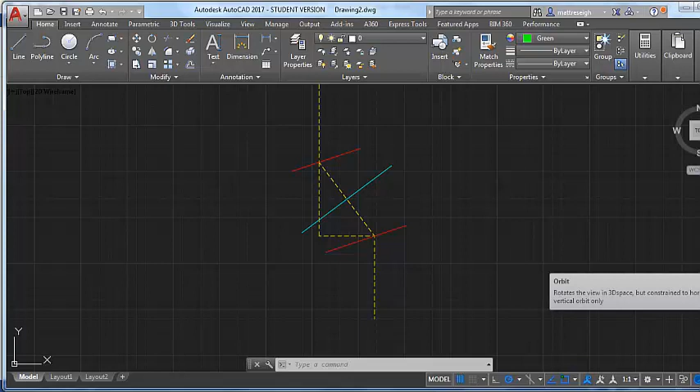So we're ready to pick up here, and we've just done a lot of reference material. Now we're ready to really start putting in our pipe, the drawings that represent our pipe here. So one quick reference check: we're working with 4-inch Schedule 40 pipe, and this 4-inch Schedule 40 pipe has a 4.5-inch OD, so that becomes the figure I'm going to start using now.

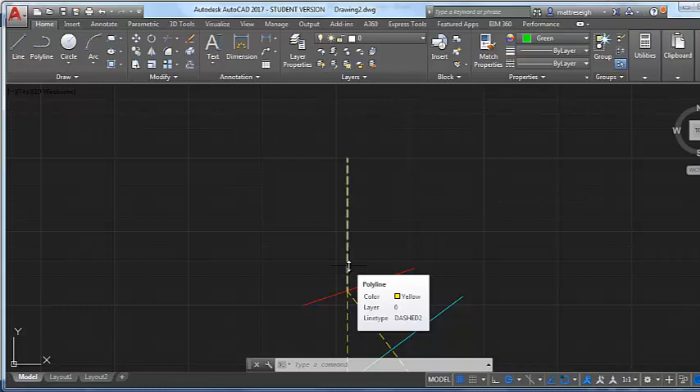Back to my drawing here, this is the way I like to set this up. We've got these arbitrary length lines off my triangle - they're just the diameter of the pipe up. It gives me a workable length of pipe. I could modify that as needed, but for right now, this length is just the diameter of the pipe, which allows me a place to set a point to do my development circle.

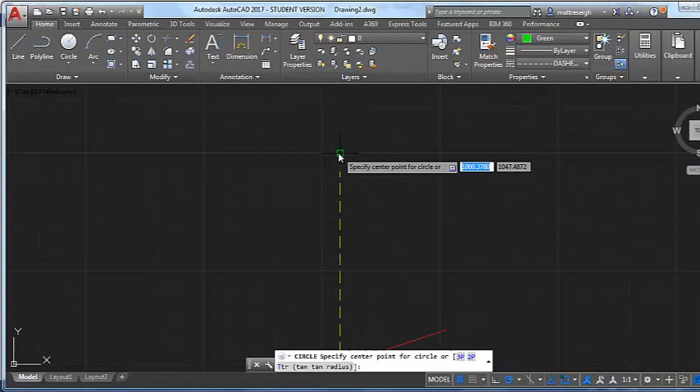All right, so the way I do that, I'm going to do my reference circle here. This is going to be a diameter of 4.5 inches, and I've used that as my center line. I'm going to copy that circle, trim that up, and divide it like we would to get some projection lines here.

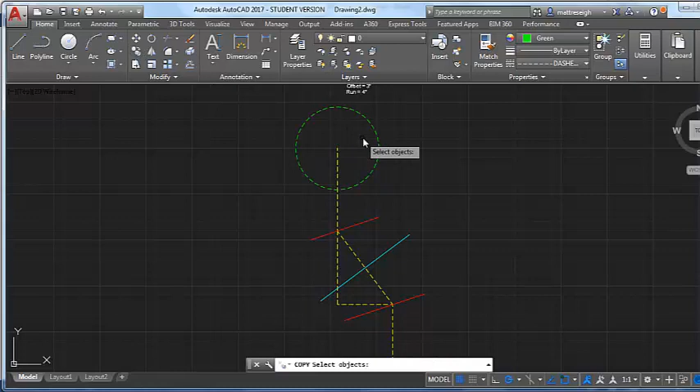So let's copy that and put one down on the lower. Let me actually do that now. From the center point here, I'll get one down here while I'm at it - same diameter of pipe all the way through this joint.

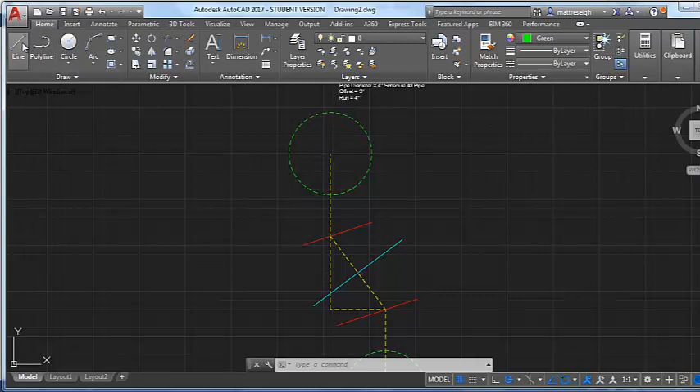And then I'm actually going to put in a solid line here for my quadrants. That's the start, or kind of end, of my pipe run there. This is where I'm going to trim this out - this is going to be my development circle up top here, and I'm going to trim this out away from it. That's going to be kind of in my drawing space here.

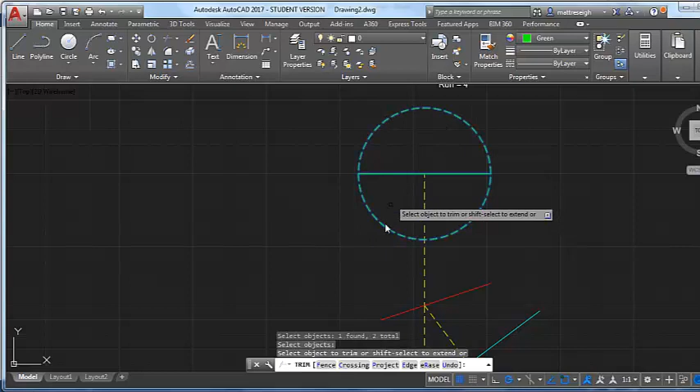Yeah, I can just trim that right now. I'll put in this upper one, and then I'll go to the lower one here. So this is what I've got set up as my development circle here, ready to divide and ready to project some lines through my part.

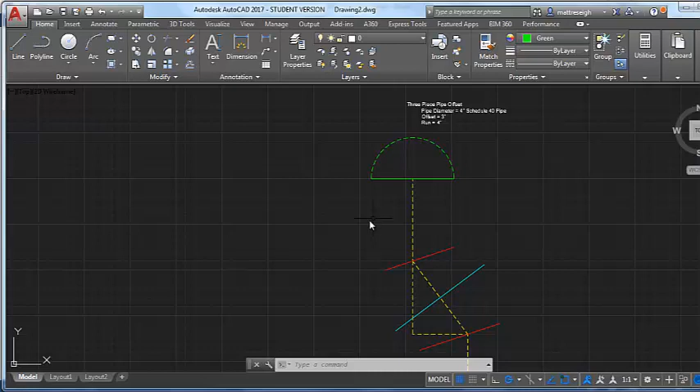Where my solid line is actually the start of my drawing, I want solid lines that come down from it - parallel lines here that meet my miter. There's a lot of tricks I can use to draw this in, and if you have tricks, use them. If something's quick to you and makes sense, use it.

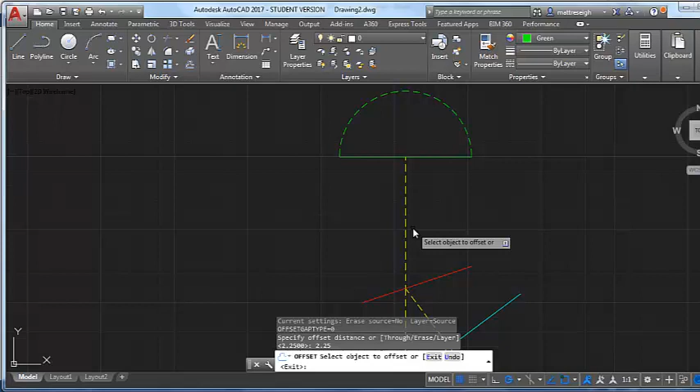Maybe something that's really simple is if I have this as an independent line here, I can use this offset, because this is my pipe center here, and it's asking me my offset distance. This is 4.5-inch OD pipe, so I'm going to offset this line on both sides of the center line, which ends up being 2.25. Then I can pick this line and snap that line over, and snap that over.

So that's starting to put in the sides of my pipe that are coming down to this miter line. They're not quite long enough - I'm going to need to lengthen them, get them to match up. My miter line isn't long enough. On one side it's almost pretty close to perfect, which just happened to be that way. It wasn't like I shot for that or anything, just almost close.

And these all change to a solid line too - they'll just be solid green because they are the sides of my pipe. So I'll change that. I'm going to escape that command so I don't offset it anymore. Yeah, I'm going to change these to a solid green.

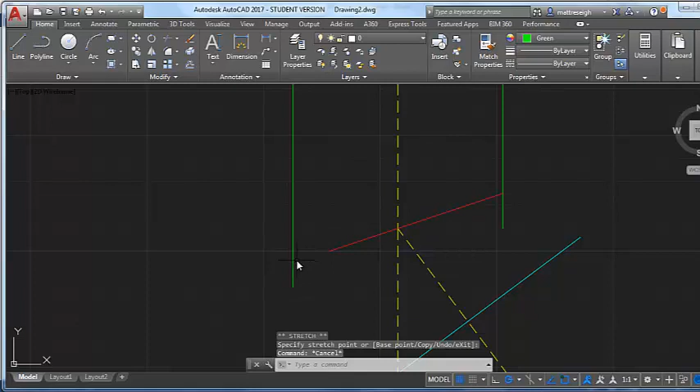Now here's where I could run into some trouble, is when I go to extend this line - this one I need to extend and come up. It's going to trim it into where it fits where this one comes in. This is where a lot of people have trouble on their drawing, because I think I drew this miter line as a polyline. So if I go to stretch this to where it intersects, this seems like that was easy and it worked good, but it always pulls off - these polylines always pull off to me.

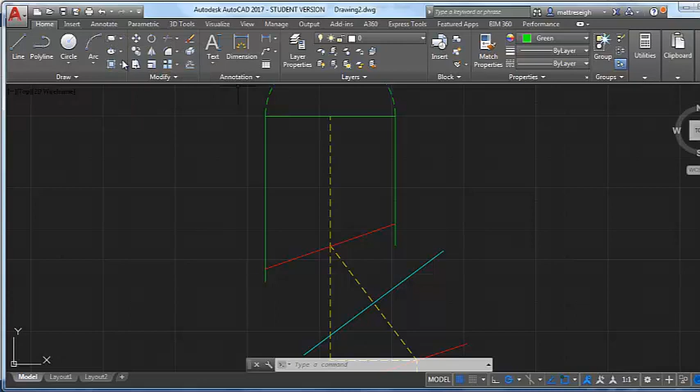So what I want to do to actually fix this is I just want to delete that line. I wish I would have drawn that as just a line. This is the difference between drawing a line that I can lengthen and stay right where it was, versus a polyline that's easy to pull off - I've just noticed. So I'm just going to delete that, and delete this one.

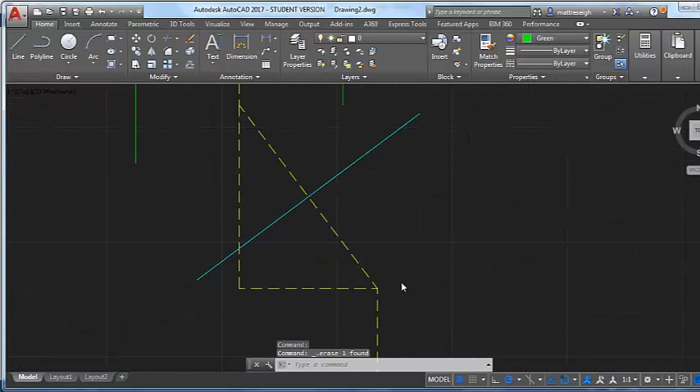This is why I like to keep my reference circles up, not just delete them, because I can come back to just this upper one where I established that miter line right there. So what I can do is go back and draw this as a line rather than a polyline, and I'll show you the difference here.

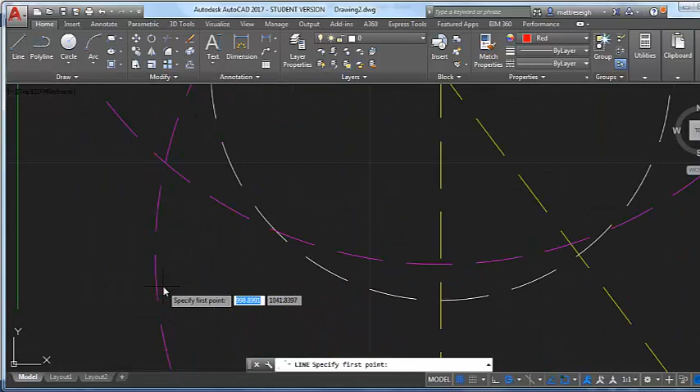So now I'm going to snap from here. I think I had adjusted that line before I did my video, and I should have ended right there, so that was throwing me off a little bit. But now I've got that as a line.

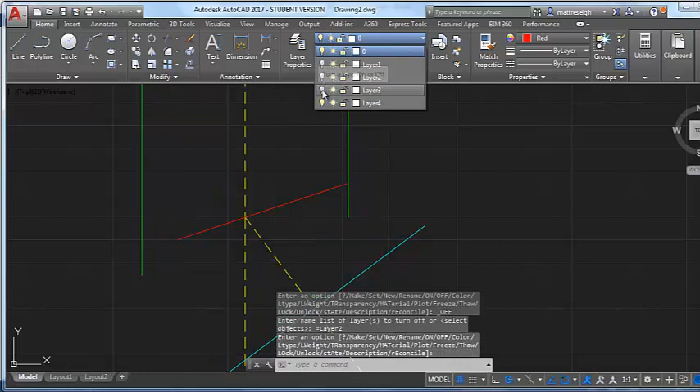I'm going to go ahead and turn off that layer now. I'm going to do the same thing on the bottom - turn back on these development circles and draw this miter in as a line from this circle to this one. Okay, and go ahead and turn off my reference circle.

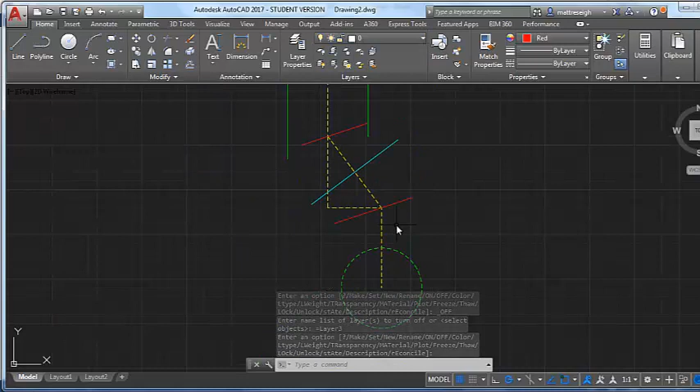Okay, those are essentially the same lines that I had, only they're lines instead of polylines. I'm just making sure they pass through my point of my angle. They do, and so what I'll show you is I need to get it out to that line.

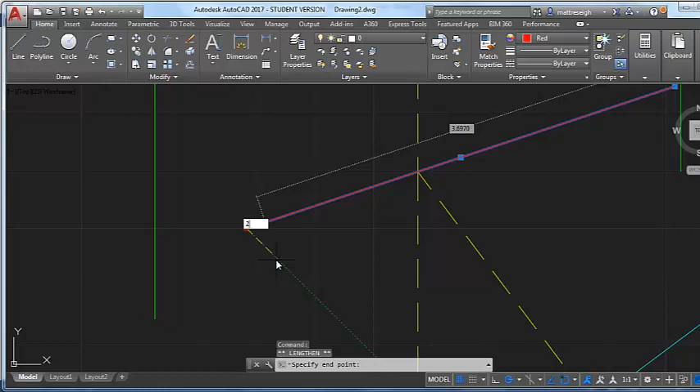If I just hover over this, I can lengthen this line. Lengthen - click on that. Maybe I'll just lengthen it by like 2 inches or something. Well, I went the wrong way because I pulled it. Let me undo that. Let's try that again.

Escape it here. I want to grip - I just kind of go to this lengthen command that pops up there, and I'm going to go 2 inches. I just have to put it in the direction I want it to lengthen. And you can see there that it didn't pull it off - when I did that, it kept it on its point.

This is just something I've found from trial and error, that I could easily mess up when I'm manually drawing. Maybe this one doesn't have to be as long, just like an inch. When I'm manually drawing it's easy to mess that up. So now I've got these overcrossing themselves, and it seems like a lot of tedious work here, but I'm just trying to get an accurate drawing that these come together.

Because I can just grip these now and tuck these into where they meet each other. Sometimes, in some respects, hand drawing like this in AutoCAD is a little bit more laborious than just doing a drawing on a board - that's a little bit easier. But so now I've got these where they intersect each other, that's great - they're tucked into each other.

I'm still on my point of my miter point at the end of my development triangle, and that's it. So that's actually, I've just kind of drawn in the top section of that pipe.

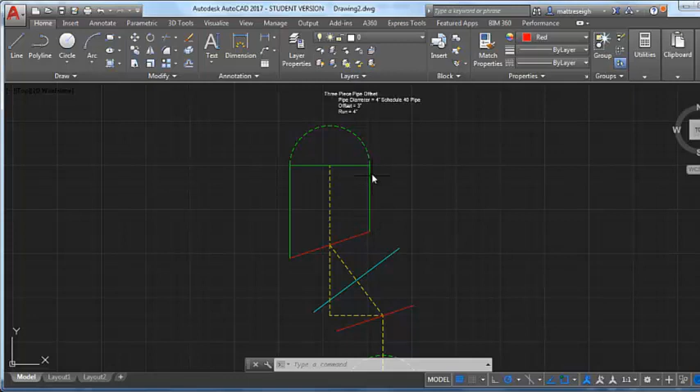And I'm going to do that down here now. I'm going to get these up to my miter lines. Then from where those meet, I just bring those together, and yeah, even if I offset this 2 1/4 inches that way and that way.

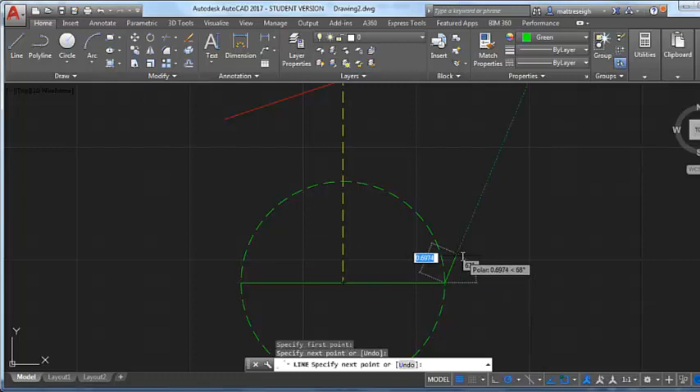But let's start with the bottom development circle - let's get it to the same point. I went back and changed that to a line when I did that with the other one. So let me continue that. Sometimes I just try to remind myself I can just draw in lines and be a little safer - I know we're used to drawing in polylines a lot. So that's that, I can trim that out.

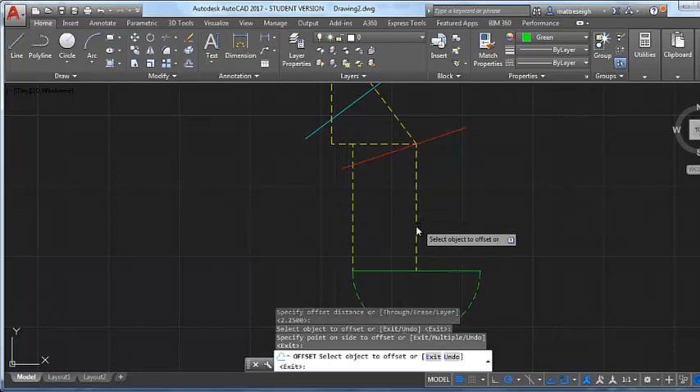Alright, and I just like these offset commands. It's got an auto that's 2 1/4. That's great. I want that one, and I want that one. I want those to be solid green.

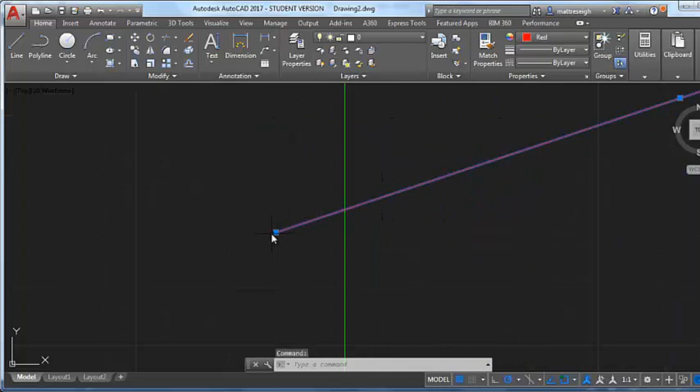So this one I did a little bit bigger reference circles when I drew this miter line, because these ones do intersect, and if I'm doing this often enough, I kind of get good at guessing and saving myself a little bit of

extra work if I can guess those, so that I can do that rather than have to extend these. But I find that these ones extend easier. It's just when they're at a miter angle on the drawing grid, that's the one that gets pulled off. Like it wants to auto snap to a degree.

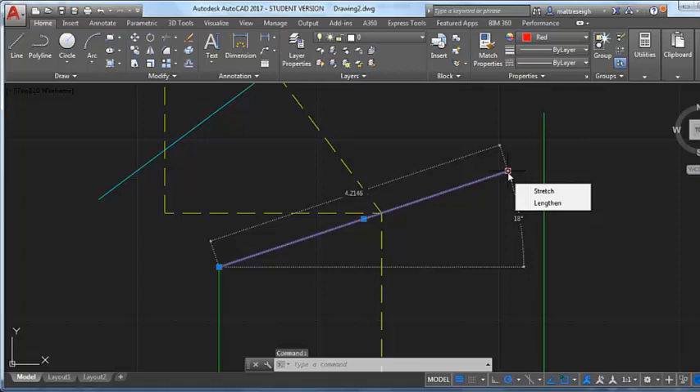Anyway, just double check yourself always when you do that. Make sure you don't lose that point. I've just had a lot of that go wrong, so I've kind of found that's what's happening.

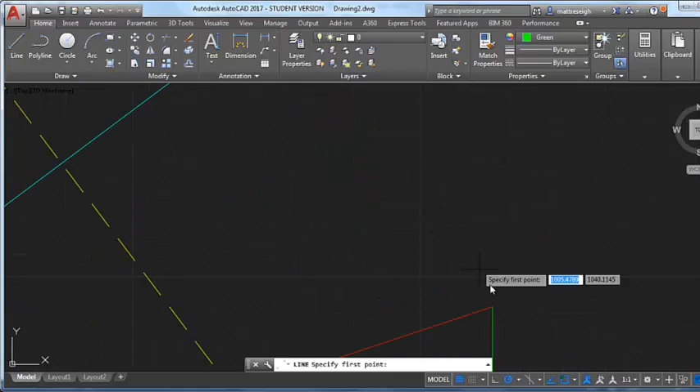All right. So now we are ready just to hook these together now. Like from where that point hits that point now, and back down here, if I repeat that, that should be my part. And then I can actually tuck this in

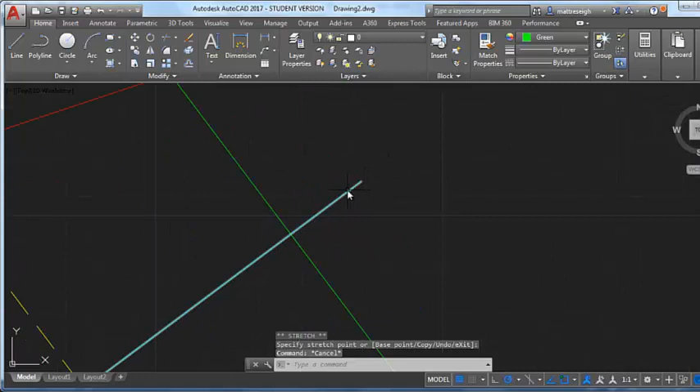back to the middle, because I had drawn that excessively long. That's just the middle. That's actually the middle section of that. That is actually the midpoint of that middle gore.

And it doesn't maybe, with that triangle in the middle there and those center lines, that kind of looks crazy to me. But really, if I look at this pretty hard, this distance from this center line up to this point is the same over here. And then the short side here is the same over here. So it is actually a center line of that middle gore.

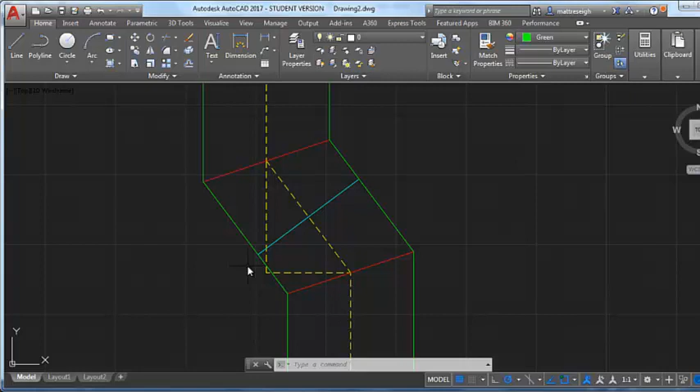And that's critical. We're going to use this as kind of the point where we develop that from. Kind of top and bottom of that. So, all right, here's our pipe offset. And we're ready to do some

to divide these circles and bring some lines down. One thing I like to do once I've done that, it'll also show me if I've pulled my miters wrong, is I can do like a quick dimension here

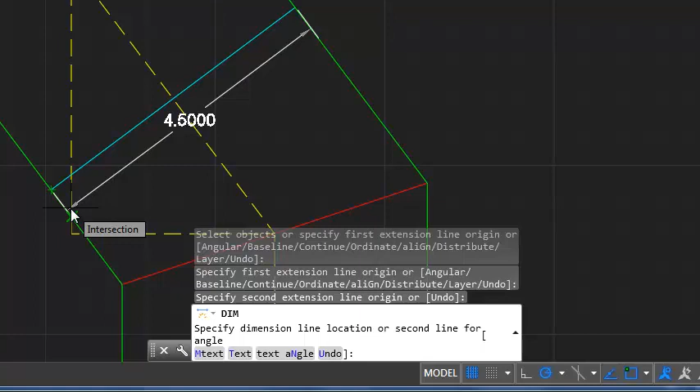and make sure that this is the outside diameter of the pipe. If this isn't, then I know that the points of my miter aren't in the correct place and they've pulled the diameter of my pipe off. But right here, I've just done this little double check that my 4.5 is still maintaining through that middle gore. So I like to double check that.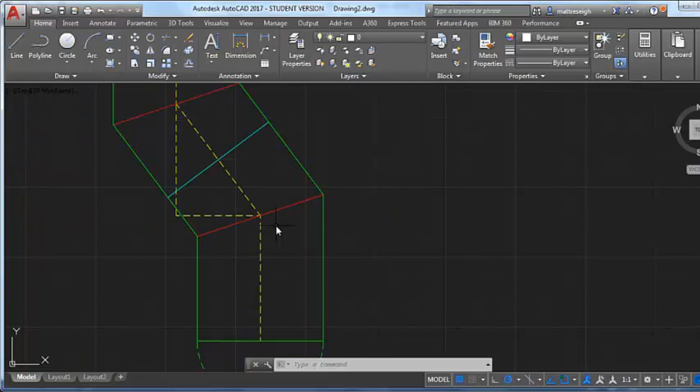All right, and once I see that's okay, if not, I know that what has happened is I've pulled these things out of alignment, and as I drew those across, it affected that dimension. So I'm okay here. So we're gonna continue on.

What I'm gonna do is divide. This goes back to my divide by 6 here, and I'm gonna go ahead and do that down here. Divide this one by 6. Get my node points established.

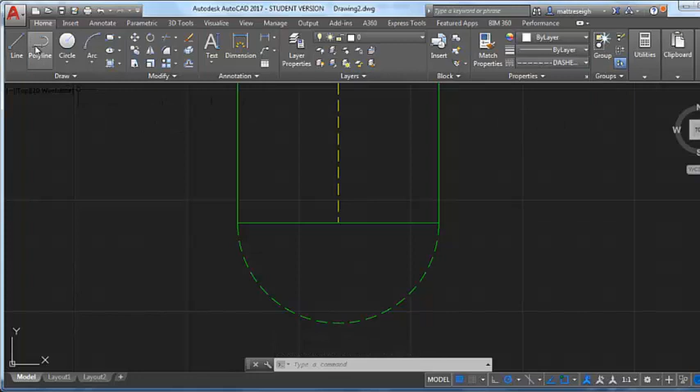And so I'll just do lines on these too, in case that, because I like to come up here, snap here, and then go up to my miter where they intersect and snap there. So that's the way I'm going to proceed to kind of ghost all these in.

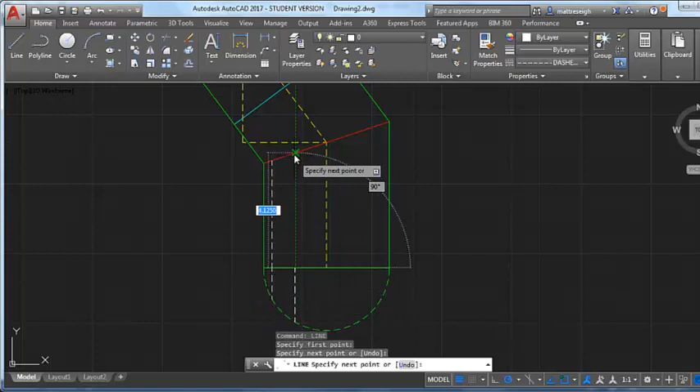Here's my next, I just kind of come along here, grab my next node point. There. Repeat that. This actually already has my center line in place, so all I really need is kind of to connect my development line.

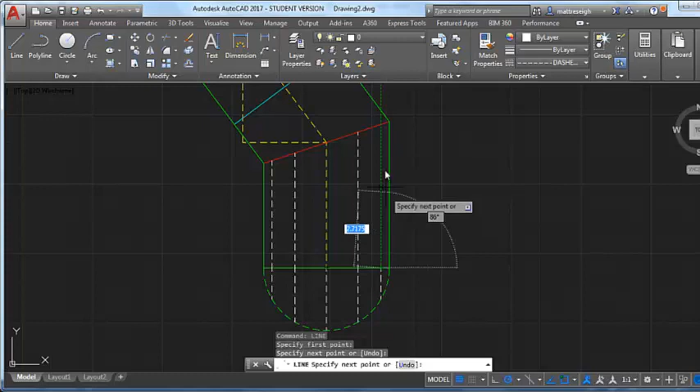I'm going to repeat this over here. All right, that's my first. I can continue this whole process up here. Click there, and to the intersection point.

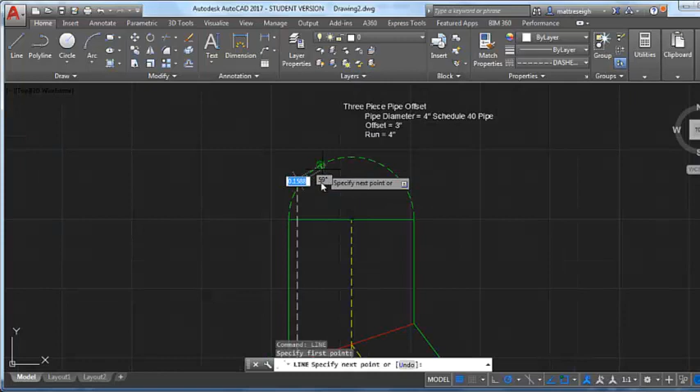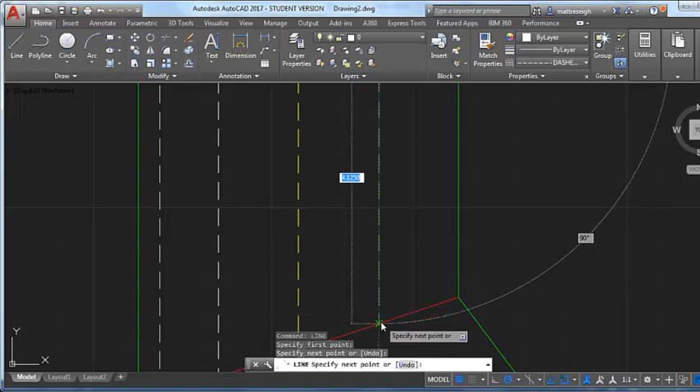And these are all reference lines. These are what establish some true lengths for me to use in my flat pattern. They're simply just for information. They kind of tell me information of where that pipe meets that bevel, and allow me to draw in an accurate bevel.

All right, now I can actually take, kind of like I did with the outside of this pipe, I can take and project these through to each other. I've got my middle one, yep, that's great.

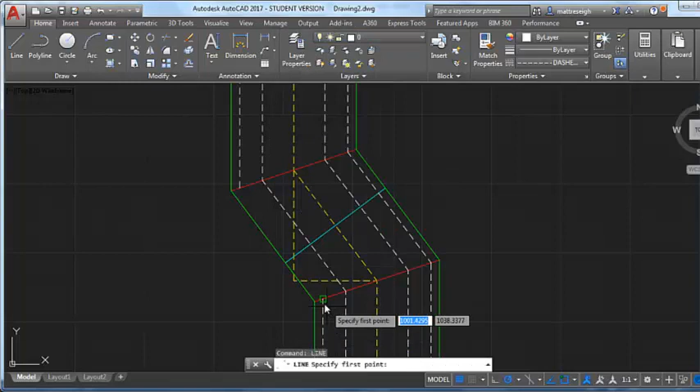All right, that's my last one across the middle. So now I've got my projection lines here.

Going back to dividing my circle, and when I said I would label these, let's go ahead and do that, because I want you to make that visual on a few of these and not forget how these are numbered and labeled. So back to my development circle: I established this as 1 and 13, then this was 2 and 12, 3 and 11, 4 and 10, 5 and 9, 6 and 8, and then 7 here by itself.

That's gonna maintain, and the interesting thing is I don't have to do a right side view of this. All the information I need to develop this is in this one view. So all these lines, being their lengths, are already ready to copy and paste over to make a pattern.

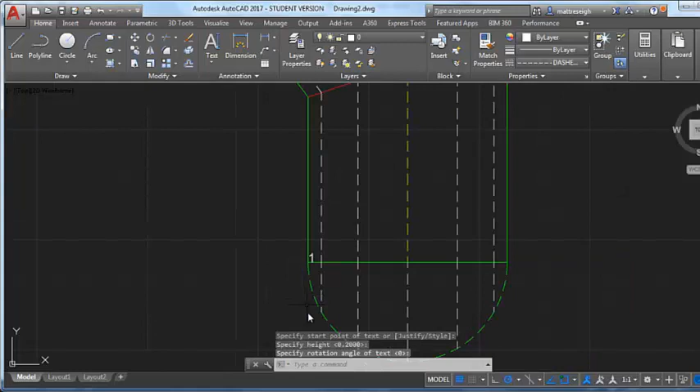So let's just go ahead and do that, and I'll quickly label these. I'm going to use a single line text, and I'll call this one point 1, and I'm going to call this one 2 and 12.

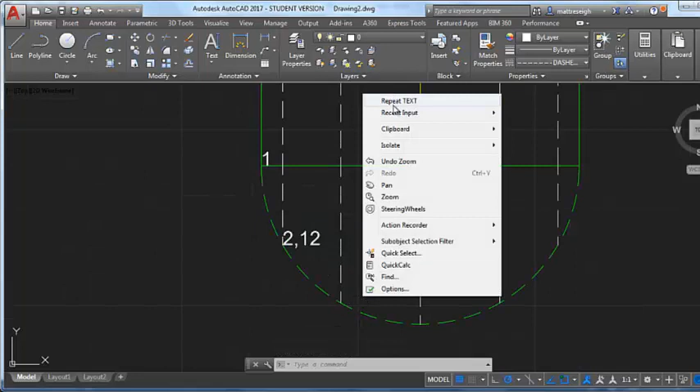And then I'll label my flat pattern so you can see the reference to how I'm dividing the circle for this. And this is going to be 3 and 11.

And 4 and 10. I could have numbered these any way. I just chose to start over there and go in a counterclockwise motion. That goes back to the way I drew things by hand - you write left to right when you're right-handed, so we would always label that one as 1 and go across.

So I could have started on the other side and called it 1 and gone clockwise. It really doesn't matter, as long as I know which point is which point when I go to put it in a flat pattern.

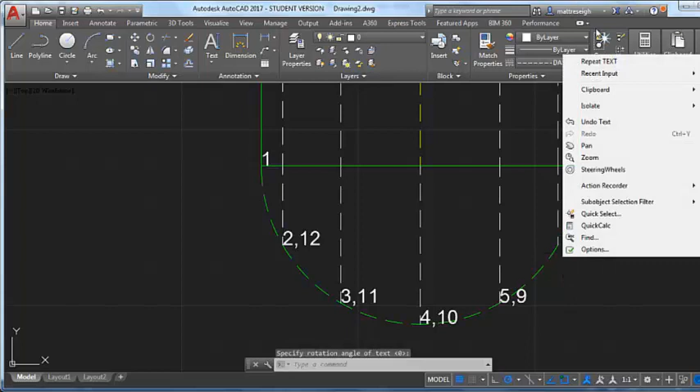So, 5 and 9, and 6 and 8. And the last one is 7. Okay.

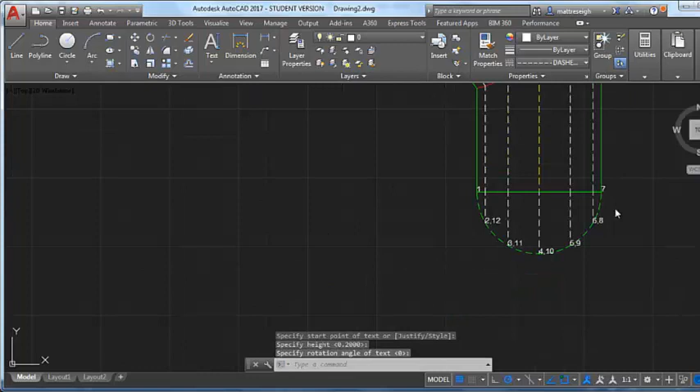So that carries through this whole part here. So establish this as point 1, it's going to be all the way up over to here. On this circle, I guess what I'd be looking at is, yeah, it's all going to.

And the funny thing is these miters are parallel with each other - this miter and this miter. I made the same length, this upper gore, this upper straight run of pipe, the same length as this. So I really only need one pattern that I can copy twice to make this part.

So this pattern down here for this straight section of pipe is going to be the same as this, and this middle one will be its own middle gore. But the numbers will be associated the same way.

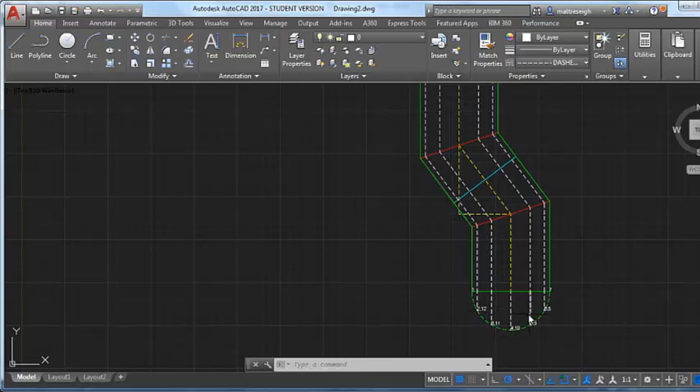Okay, so now we come over here and we're ready to do some flat pattern work. A lot of times I'll do the outside of my pattern in red - it's kind of like my cut lines, is what I think.

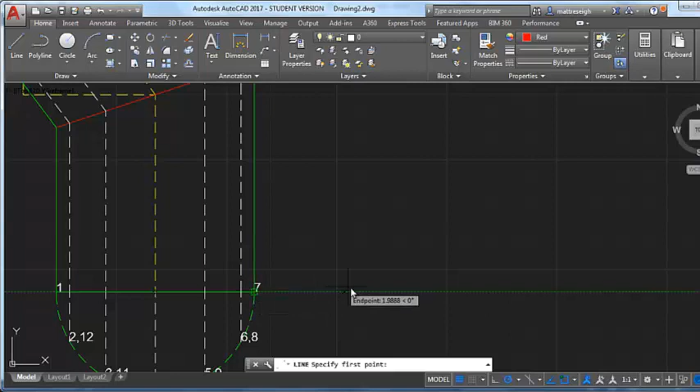So what I'm going to do is start this thing parallel with that one just for keeping my drawing clean. So this is going to be the circumference of a 4.5 inch pipe.

So if it's going to be a paper pattern, I don't need to take any metal or allowances into consideration. I can just do this with 4.5 multiplied by pi.

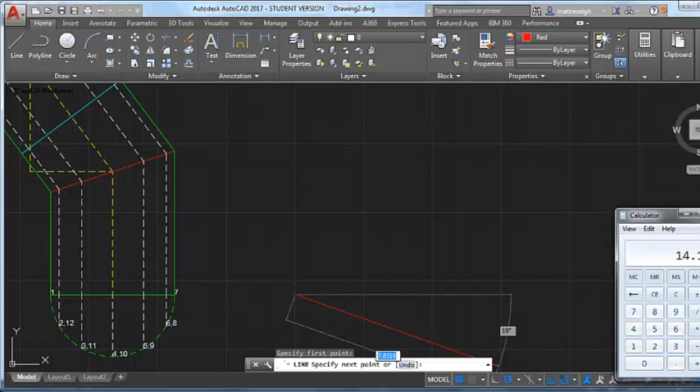So this line, I need to make it 14.1372. I'm going to make this 14.1372 inches long, and that is the circumference of a 4.5 inch OD pipe.

All right, if that was metal, if it was like 1/4 inch metal, I would have needed to take that 4.5 inch OD dimension, subtract a 1/4 inch if it was 1/4 inch metal, and then times by pi, and that would become the stretch out for that. So we'll do some of that too, but right now let's just work in paper.

So this is a representation of the full pipe. Let's go ahead and divide this line, divide it by 12. There we have our 12 node points, and I'll show you how this looks now.

So very much the same way, I'm going to start with a weld seam right here on one. It's like my shortest run of pipe is right here, point number 1, and my longest would be 7. So a lot of times I'll minimize weld seams, and through this part, I could choose to rotate the weld seams.

I could choose to make the weld seams line up - I kind of have control of that, or maybe there's some coding I have to follow. But a lot of times you'll see me do the short seam as my initial start point of my pattern, so I'm going to go with that.

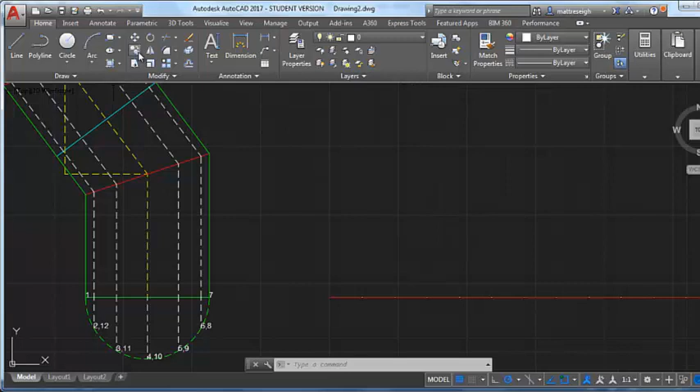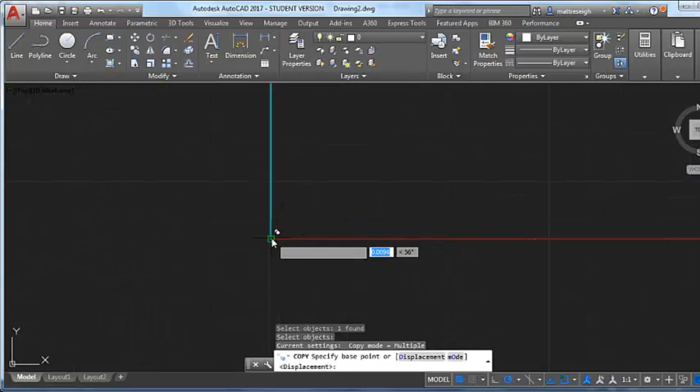I'm going to copy this line by its base point, and it's going to be the start of my pattern here. I'll zoom in to make sure I get these on the node points. So that's point 1, and the pattern comes back around to that. While I had control of that, I probably should have put one on the other end of my pattern here.

Real quick, I'm going to go ahead and number this pattern line here in this view. That's point 1. I'm just going to work 1 through 12 this way.

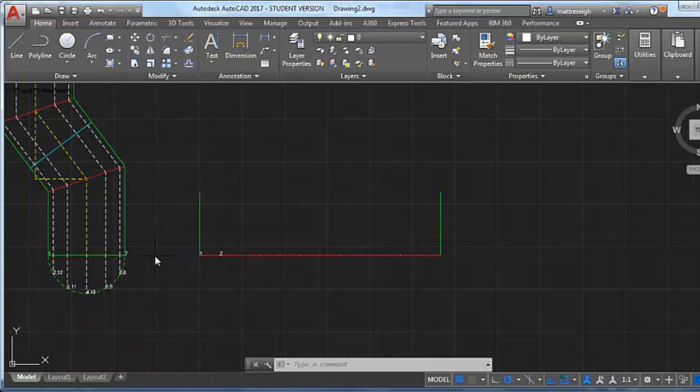So let's repeat that - let's call this point 2. I should still be able to get it, let me try. Let me just try to copy one while I do that, and make sure it's easy for me to get on my node point.

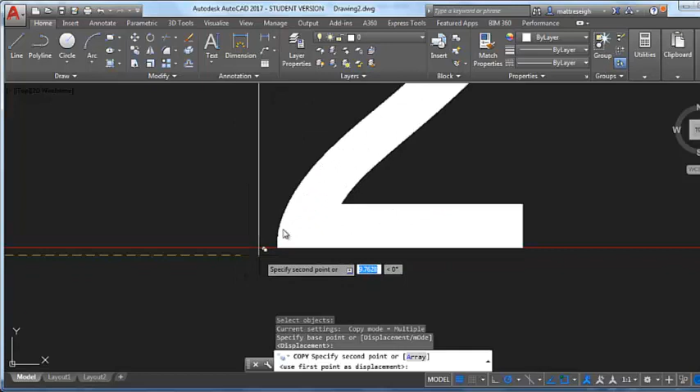Because I would copy point number 2, which is this one right here, by that base point, and I want to paste it on the node point. I just want to make sure I'm not going to attach it to the text. Yeah, that's easy to do. So that'd be point 2.

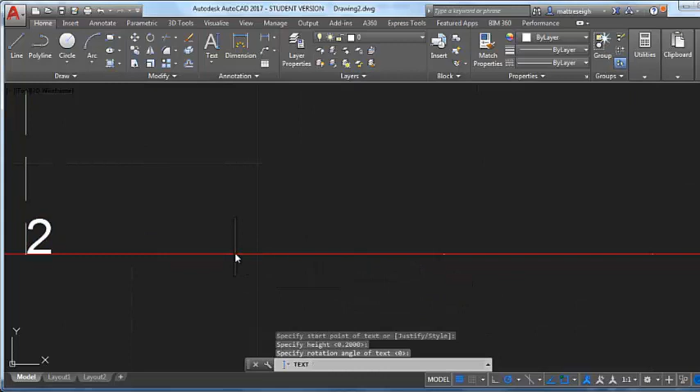So the thing is, that line represents 2 and 12. If I had 12 labeled, which is actually this next one in, I could have just dumped that over there too. So let me finish numbering these. I told you I wanted to do this on a few until you get the feel for these points.

That's point 4. 5. 6. This is the center line, so once this is actually halfway around the pipe at this point.

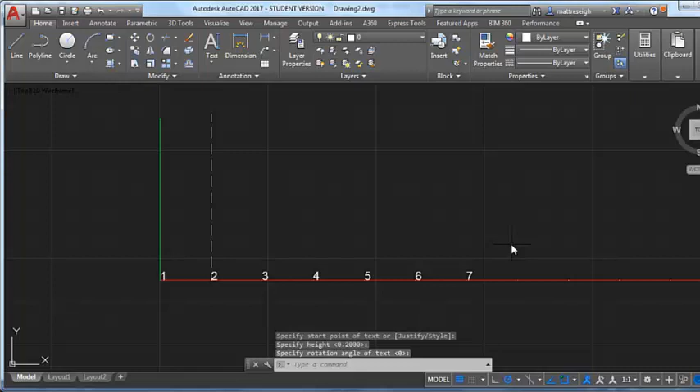And then from there we kind of have that repeat pattern. That's why those points are doubled up, right? So that one's point 8 - it does have its own number. I mean, there are times when that isn't the case, when things are non-symmetrical, but this one is number 9.

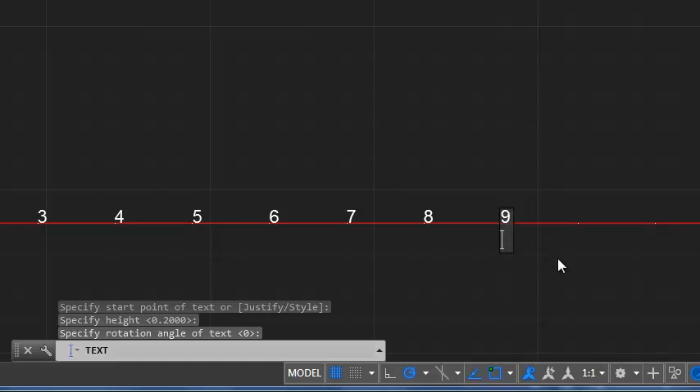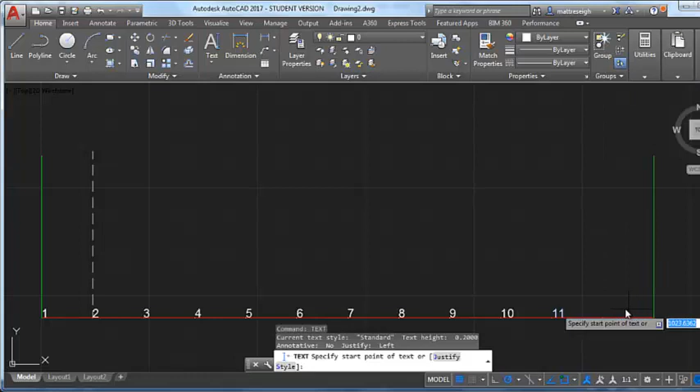Just a couple more to do. 10. And 11. Whoops - escape on that, just want to make sure I don't change my text height. It's always asking me what my text height is and my rotation angle when I do these text entries. And this last one, 12.

Okay, so there's our flat stretch-out pattern, numbered, corresponding with the way we've developed our circle. Now what I can do - that was the last one, I left off at point 2. So the only thing I didn't do while I had this, I'll show you how you usually do these patterns. That's point 2 and 12.

The next one I'm ready to do is copy number 3 by its base point and paste it right there on 3, but 3 also goes with 11. So I can actually copy this and kind of maximize my efficiency here.

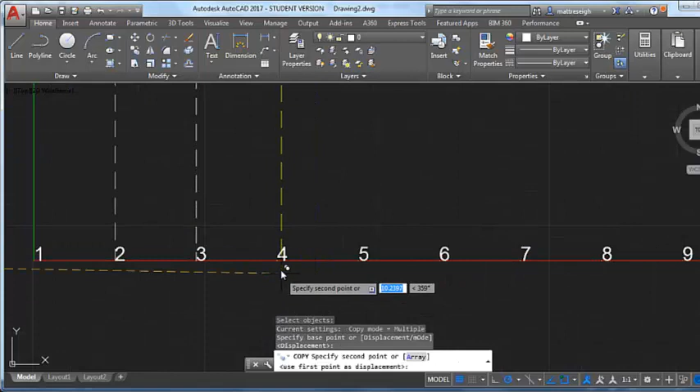I'm ready to do point 4, which is 4 and 10. The nice thing about this is, because I used a center line - see, I actually slightly missed that, so let me just make sure I get it on the node point. Just be aware of that, really check yourself when you drop these.

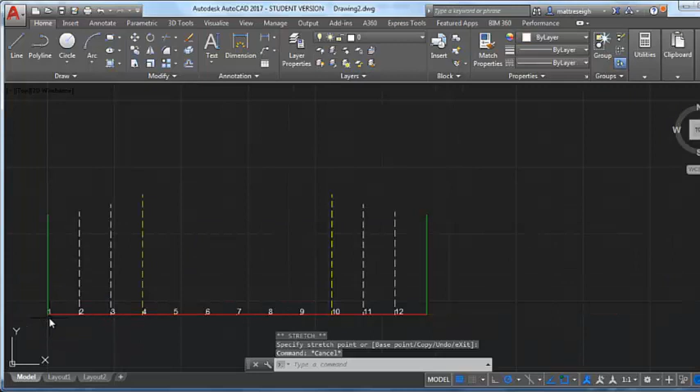Try to be accurate - I can see I missed both of those. Those ones wouldn't be the end of the world if I was just slightly off. The end ones can be, because it can mess up my pattern to where it won't cut out if they're not joined. So I usually try to turn this into a polyline at the end to make sure this is all conjoined how I drew it.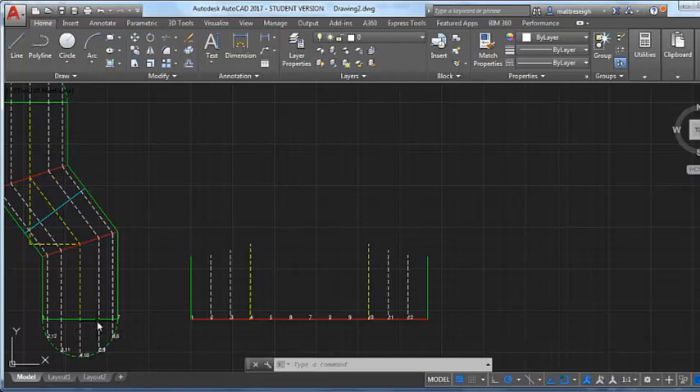That's just one final check to make sure all my points line up - kind of saves me some errors on the plasma if I'm going to cut it out. So back to my copy here, I'm on point 5 now. I'll zoom in and make sure I'm getting that node. Looks good there - so 5 and 9.

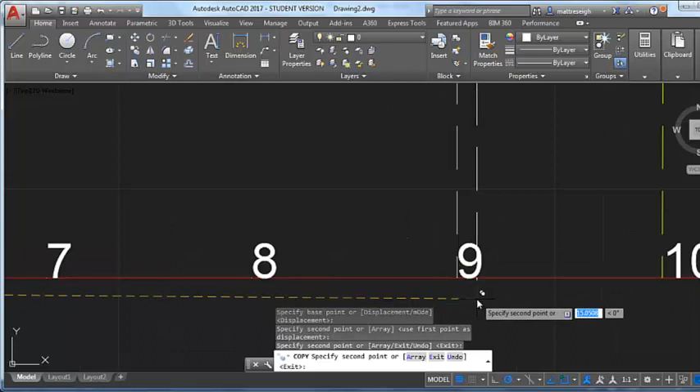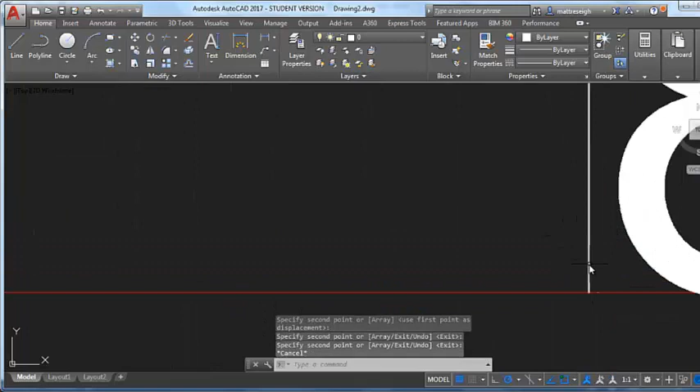6 and 8. Yeah, sometimes that's easy to miss. That looks better.

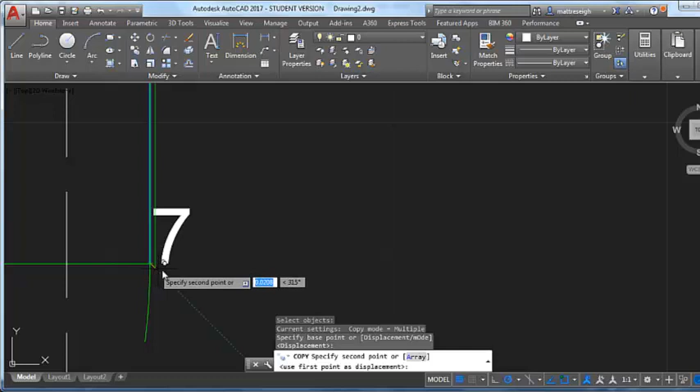Okay, and the last one's point number 7. Let's paste that over here. All right, and that's nice too because it kind of has a different color for my halfway mark around that. So now that's actually what that end of that pipe looks like, stretched out flat.

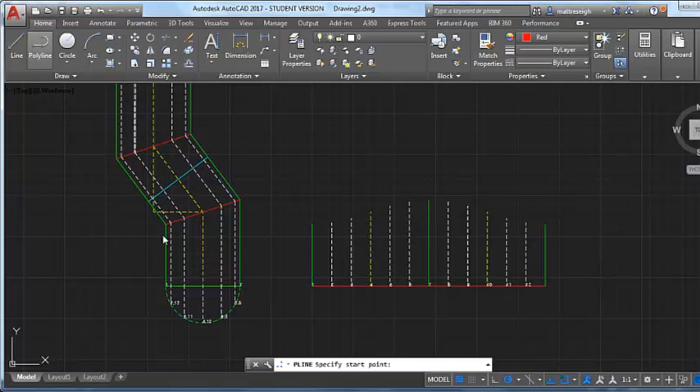So all we need to do is draw in this top, and to do that I'll use a red color solid line. I'll use a polyline for this because I want to start it here. I'm going to use an arc and a second point option here, so I just make sure I'm snapping to the tops of this, and I second point that again.

This is just the way I prefer to get a sweeping pattern, as if I was using those French curves to draw my lines. I wouldn't just draw these line to line and have them straight. I would actually draw this as a curved line.

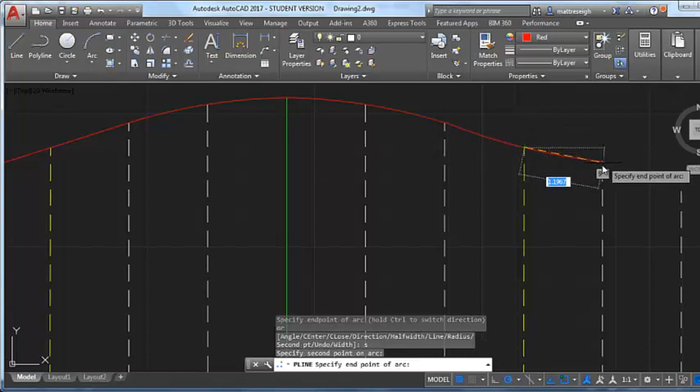The way I've found that I get that is just to do these arcs with second points with a polyline. If it won't let you drop the next line after I've picked the first point, it won't let me drop it. Usually it means it's too straight.

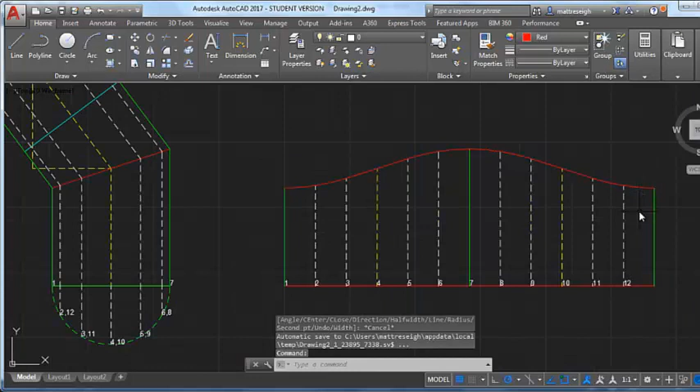Sometimes I just go back to a line and do it as a straight line. Some of these curves are really, really small curves on some of these parts that we draw. So that one ends up being a nice sweeping curve.

And yeah, the last thing I might do just on this is change the end of these to be red.

And then, like I said, what I do as a final thing to make sure I've got everything that touches and make sure it works good, is I'll do a polyline edit. I just want to do a join. So I'm going to join that and all these, and that'll tell me if I've got things that aren't lining up.

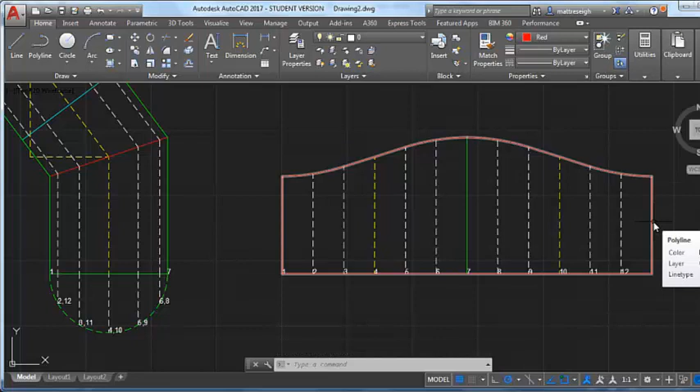If I can get off, see, that's good. So if it all highlights, that means my intersection points meet up. And if they don't, just go back in and zoom really close in on this and see if you've got something that's pulled off skew, or that you missed the node point.

Like I said, if you're just a little bit off right here, all that is just a little bit of variation in your pattern, and so it's not the end of the world. If I didn't hit all these node points perfectly, there is some room for error there, because this is just kind of a hand-drawn AutoCAD file.

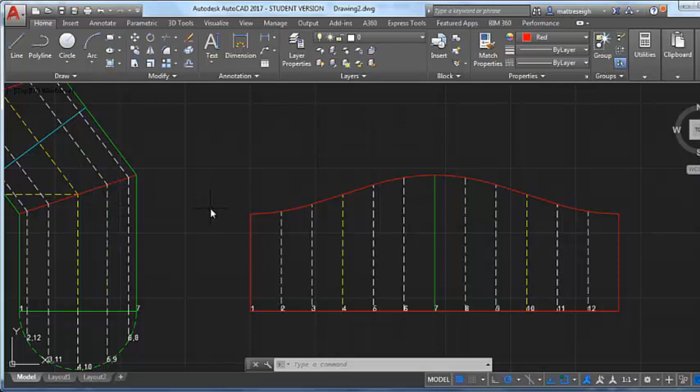I've just hand-drawn this, used that information to develop this, and I'm going to end this video here. I'm actually going to have a part 3, because I want to carefully go over how I develop that middle gore. So this would be the flat pattern for the lower section and the upper section.

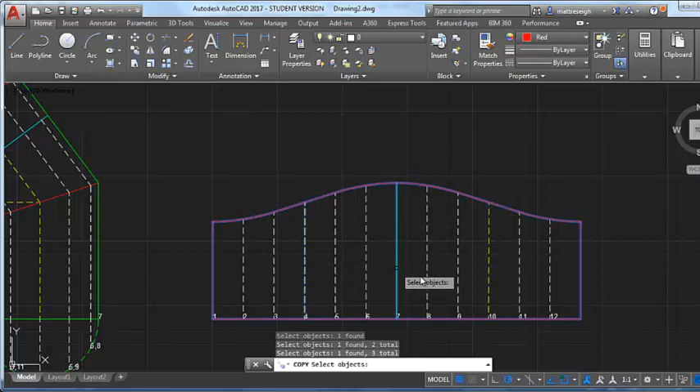So I can actually choose to copy that. And for me, instead of drawing that whole upper gore, it's going to be the same thing. I just choose to copy this, maybe with its center line and its quarter marks, which is what becomes critical to me. Maybe information to have.

If I'm making a cut file, maybe I need to get rid of those so that they don't get cut by the plasma or something.

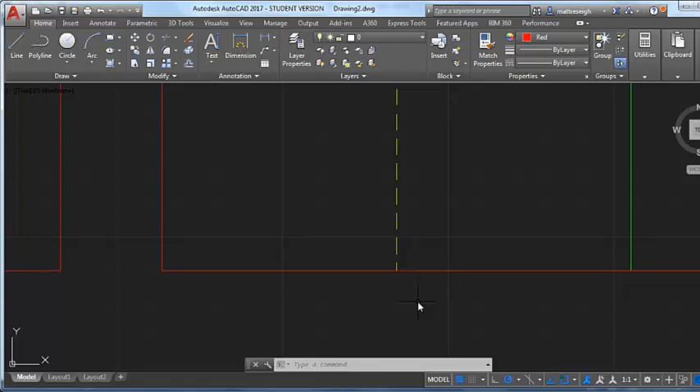But what I would see sometimes plasma operators do, if your drafters are helping you out a little bit, is put a little tick mark there, like just a little bit of a V cut on your quarter marks and your center lines. They help you as a fabricator get things clocked and timed as you put them together right. Knowing where those are helps, especially if these things get big and they're 24-inch duct. It's really helpful to keep track of the material in between quarter marks.

And so if I'm printing this off as a paper pattern, that automatically gives me those that I can transfer to my part. So use a little center punch, or use a chisel on the end to mark the end of my flat pattern.

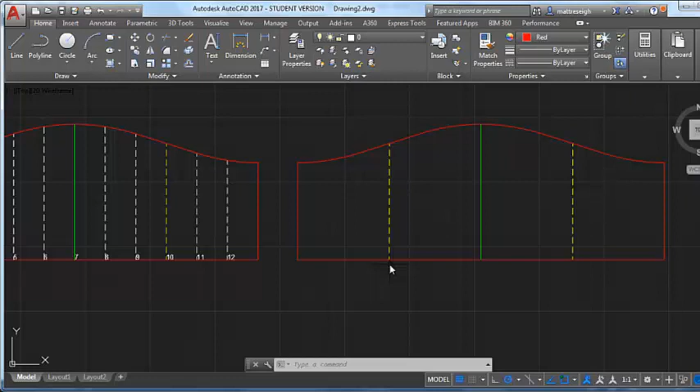So anyway, 2 of those. Now just the middle gore. So stay tuned for part 3, and we'll get through that middle gore, and then we'll be off and running. We'll have this thing whipped.